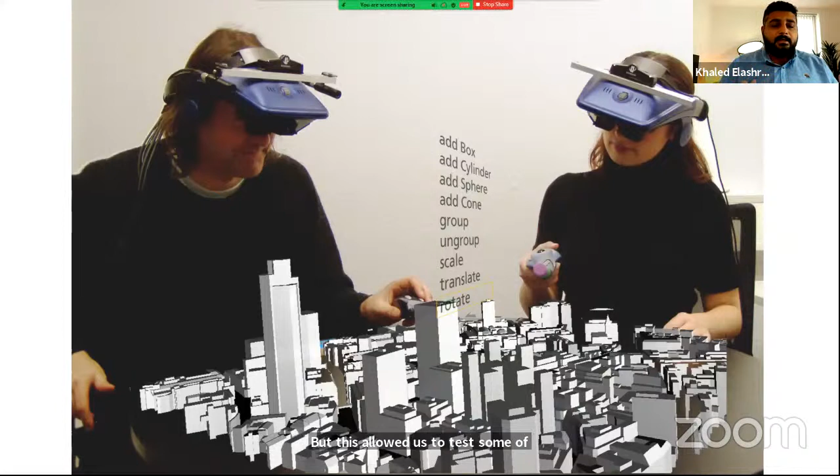But this allowed us to test some of the use of design in augmented reality early on, though the technology was not yet very widely distributed. Because we investigated the possibilities of the technology so many years ago, today we're able to use augmented reality and virtual reality not only for visualization, but also for team collaboration and design. This is very important because collaboration is a core part of our design process.

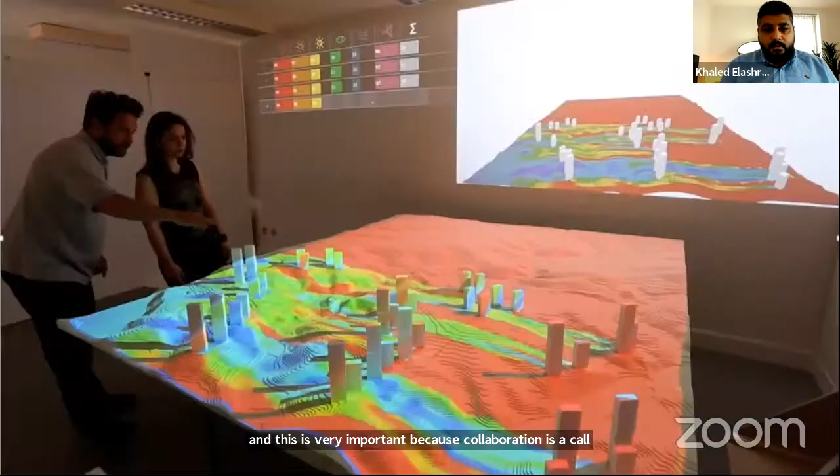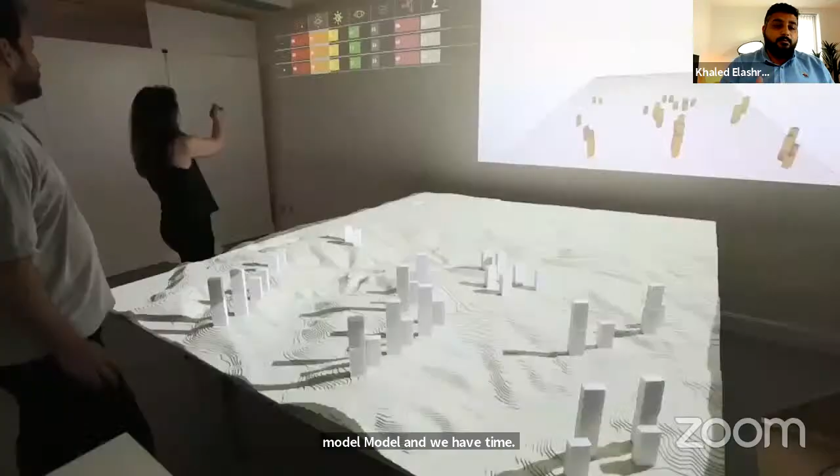The office's focus on performance-driven design and sustainability inspires a lot of the tools that we developed. What you see here is one of our bespoke applications to quickly analyze options and break down the barriers between physical and digital modeling. So, for example, we are tracking and capturing a physical model in real time, where you can manipulate it, change the location of the buildings, and at the same time get instant feedback on what the performance of this design might be.

And of course, as technology develops, our bespoke performance-driven design tools also evolve. So, for example, now we're using gaming engines to develop our latest application called Sandbox, which is an interactive application that works like Minecraft on steroids, where the user can go in, create design options, and analyze them in real time. It can also run in multiple interfaces from touch to AR and VR.

There is a variety of performance evaluation criteria that drives our design decisions, and even more so when we are not just looking at the building scale, but also at the city scale. So from sustainability to investment models, there's a lot of things that can drive how we design urban spaces.

So we bring the process of optimization according to these drivers, not just for buildings, but also for cityscapes. For example, if you're having a road network and discrete buildings, we can instruct a computer to go through hundreds of thousands of iterations, running through a multitude of analysis, and at the end provide a solution space that we can check and find the best performing option out of it.

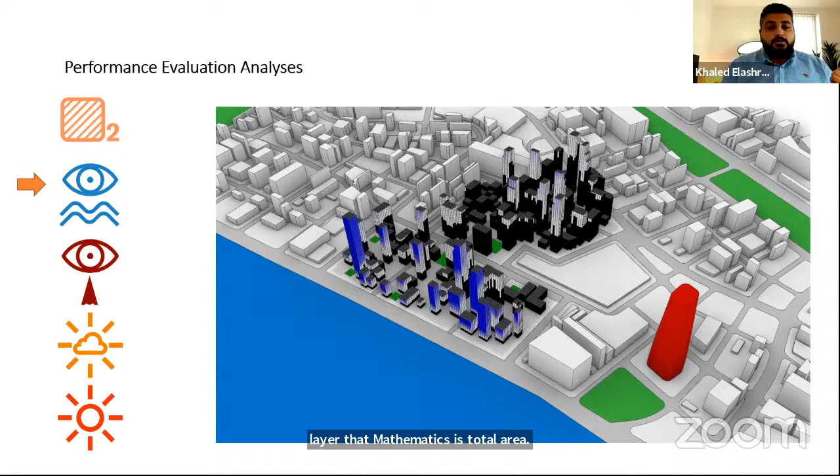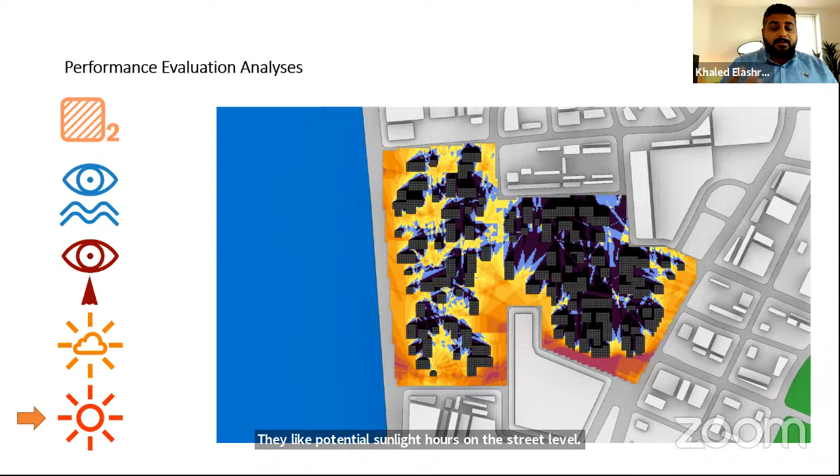Let's take this example. We look at finding a building layout that maximizes total area, views towards the river, views towards a point of interest, daylight potential, sunlight hours on the street level. Usually you would spend months and months creating and analyzing different options manually.

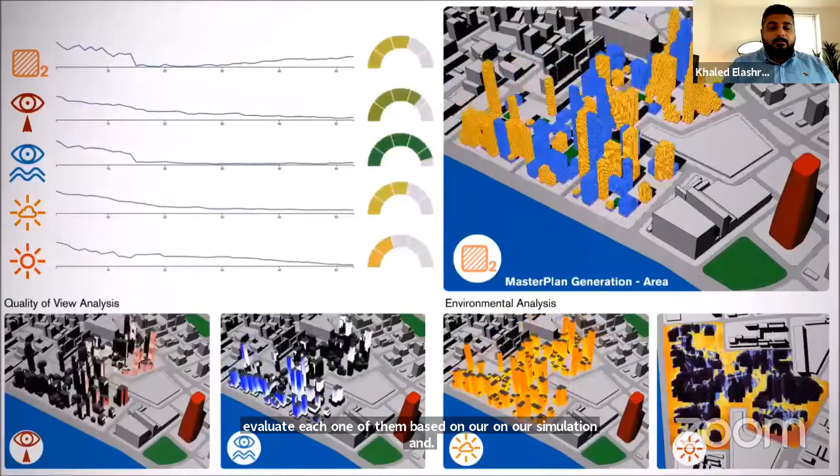But what we do is we actually use a genetic algorithm to create thousands of generations of options, evaluate each one of them based on our simulation, and this allows us to cut short the process that can take months and months into a matter of hours.

And what we do here is we actually run it on large scale cities, not only on buildings. But as I said before, innovation can be applied on all scales and all stages of design.

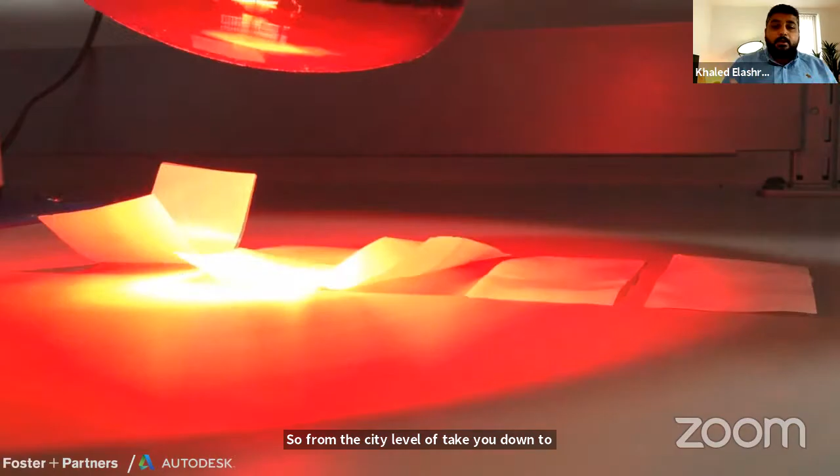So from the city level, I'll take you down to the material level, where in collaboration with Autodesk, we used machine learning basically to predict how a passively actuated material could react to temperature.

So with the help of a tool we have in the office called Hydra, we run thousands of analyses to understand how these laminates might behave under varied heat conditions.

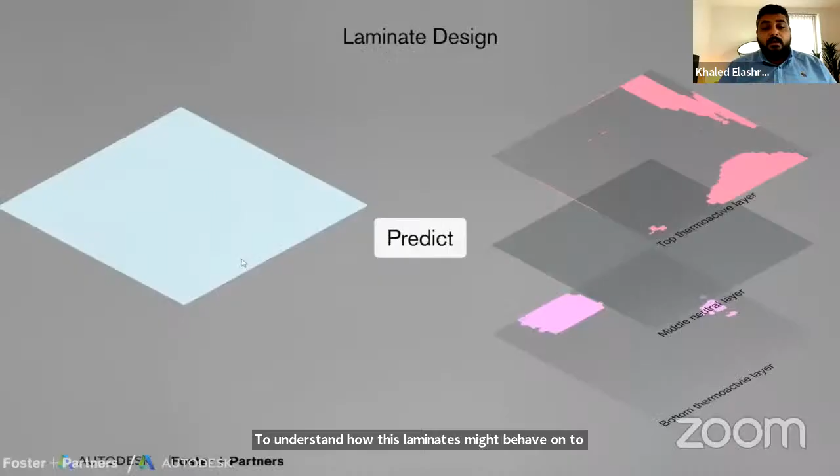We then used that data to train a deep neural network to tell us what laminate layering we should have given a particular deformation. So we kind of reverse the operation in order to be able to check our design intent first, and then figure out what materials, what layering we can have in the laminate material.

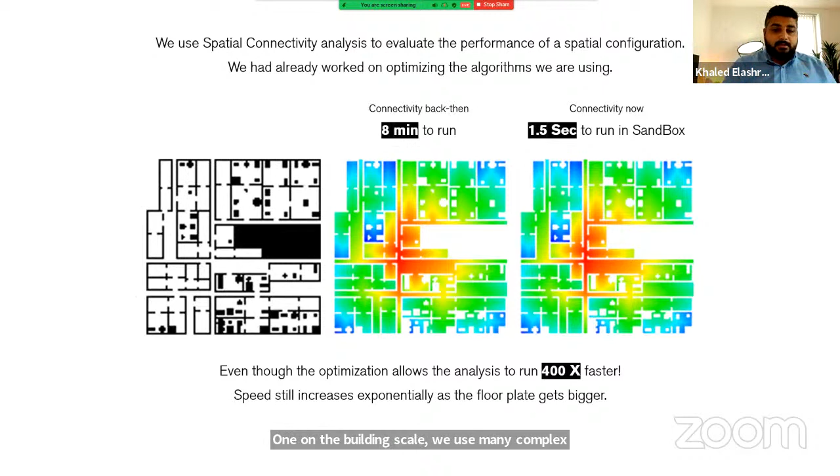Sorry, I skipped one. On the building scale, we use many complex analyses to validate design intent. One example of that is an analysis that measures connectivity from one point of the plan to all others.

This is usually a good indication of how well the plan is performing as a co-working space, but usually it takes a lot of time to run. So we use machine learning to train a model that can predict the result of the analysis without the need to run the analysis itself.

And in the end, we can have a speed increase of almost 50x from running the analysis, from using our model rather than running the analysis.

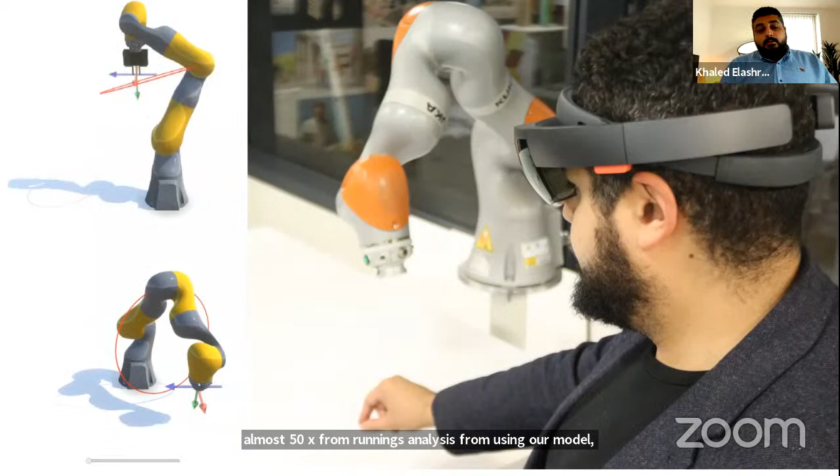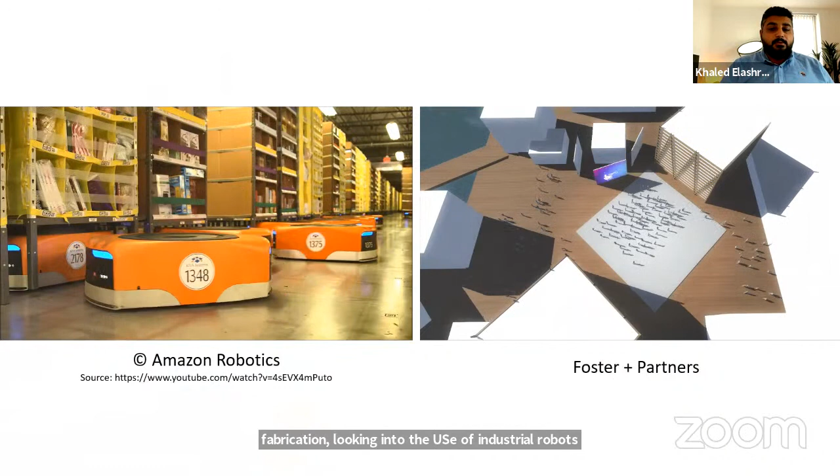We also have big interest in robotics and in fabrication, looking into the use of industrial robots, and increasingly looking into the use of mobile robots like the Amazon Kiva robots, for example, to reconfigure architecture spaces, both in the interior and the exterior, which gets us to the main topic of today, which is the recent collaboration we did with Boston Dynamics.

This was a group effort headed by Martha Tsigkari and Adam Davis, who are partners in charge of our team. And I'm happy to hand the stage to Anders and Sherif, who will talk you through the process.

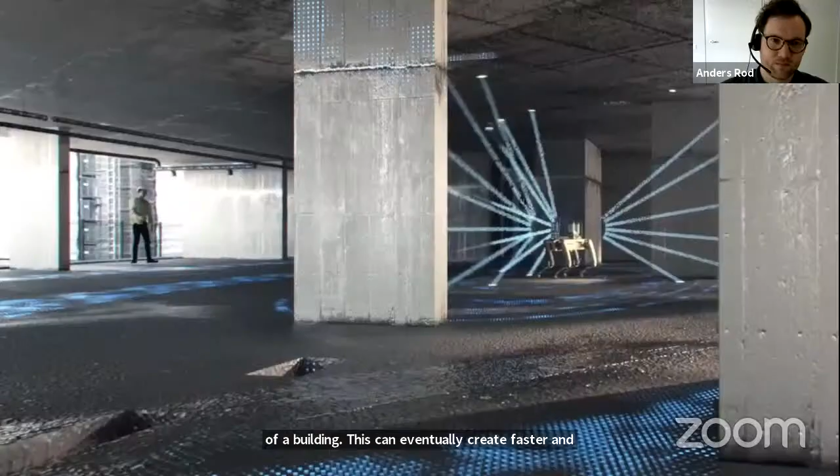This is because constant and quick checks to monitor accurate timeframes on site can be instrumental in integrating design and construction and allowing for further flexibility.

Additionally, we have been investigating how these scans could be of use, not only during the design and construction process, but also when the building is operational.

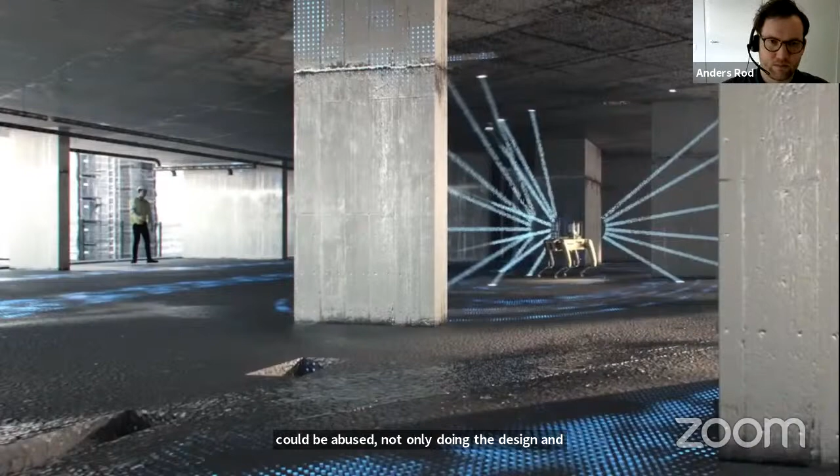We see great potential in digital twins, that is, a digital representation of a real-world process. This image shows the hub space on our campus. The hub is a flexible working and social space with a wide range of uses and constantly changing furniture layouts.

Scanning spaces like this at a regular interval allows us to assemble a detailed timeline of the space. By creating and using this twin, we can visualize and simulate interactions between the designed space, occupancy, environmental condition, and energy usage.

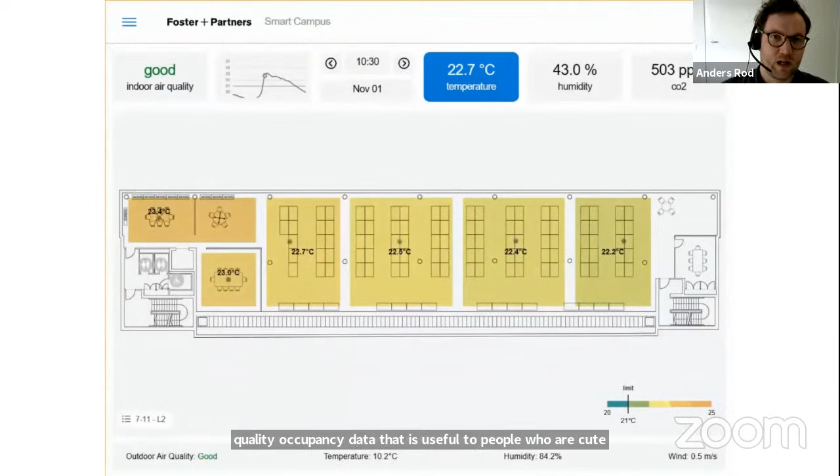Smart buildings gather information such as air quality and occupancy data that is useful to people who occupy and manage them. Our corporate headquarters in London is a smart campus with detailed readings of air temperature, other air quality measures, and occupancy, and we're doing this across our estate and across seasons and years. Repeated scanning sessions allow us to correlate changes in the sensor data with changes in the physical fabric of the building and spaces.

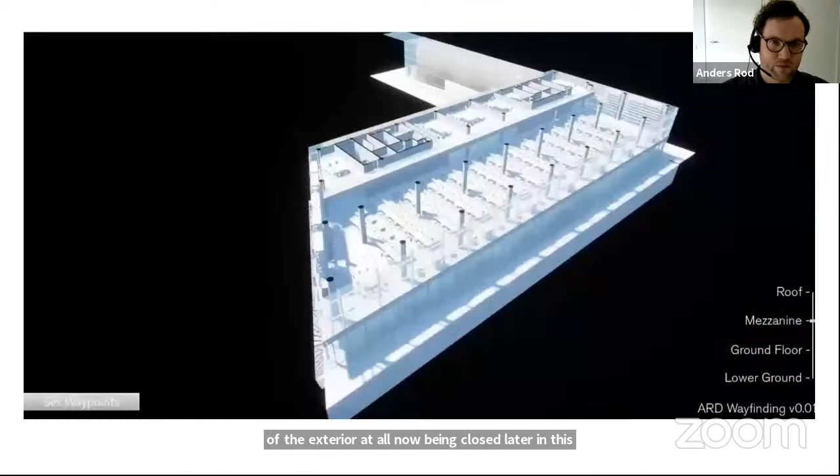Sophisticated, up-to-date spatial information is also critical for wayfinding. Here we see a three-dimensional wayfinding application for our main studio space in London. With the addition of environmental and occupancy data, such an application can help staff and visitors find spaces appropriate to their intended use and personal comfort. Imagine telling a virtual assistant, 'I would like a cool space for a quiet meeting with two of my colleagues,' and then just being shown where to go.

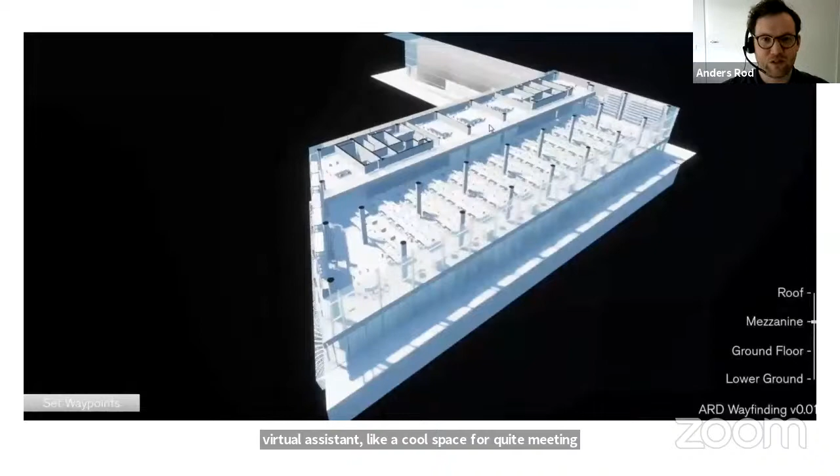We are also interested in digital representations of the construction site and capturing how the construction progresses over time. My colleague Sherif will discuss these construction twins in detail later, but before that, he will introduce us to Spot.

Like Khaled mentioned earlier, we have always been interested in using 3D scanning on site. We met with Boston Dynamics during a conference and started talking about the use of robotics on site. With our interests and vision aligned, we were invited to their early adopters program. At the time, back in February 2020, we were the only architectural firm on that program.

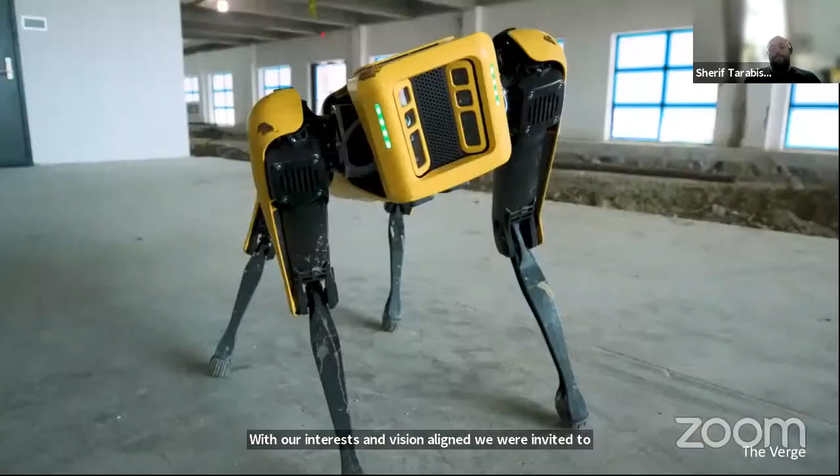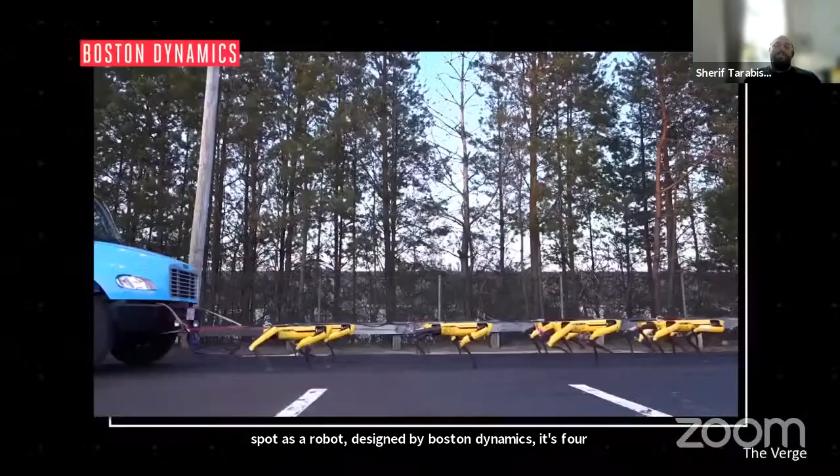Spot is a robot designed by Boston Dynamics. It's a four-legged, semi-autonomous robot, and of course it's also an internet sensation. You might have seen it with its friends towing trucks, dancing to Bruno Mars, or even having a choreographed dance with its extended family.

Spot is a very capable robot. It can maneuver tricky terrain. It is controlled by a tablet where you can set and control different features and parameters. It can move through the controller or autonomously.

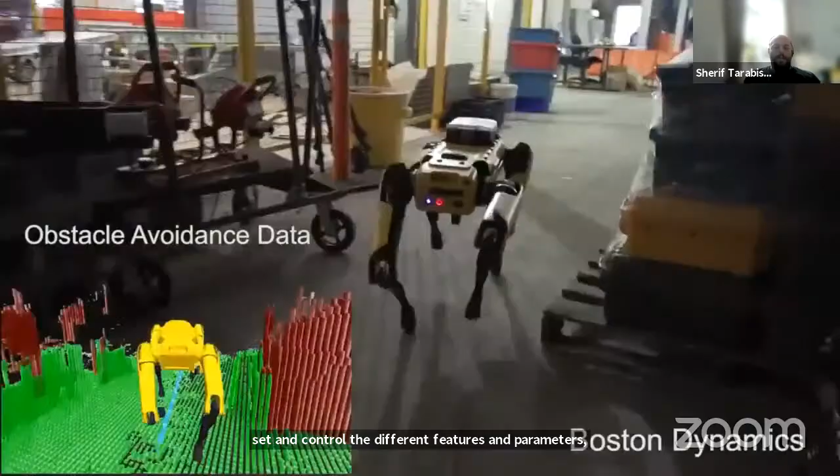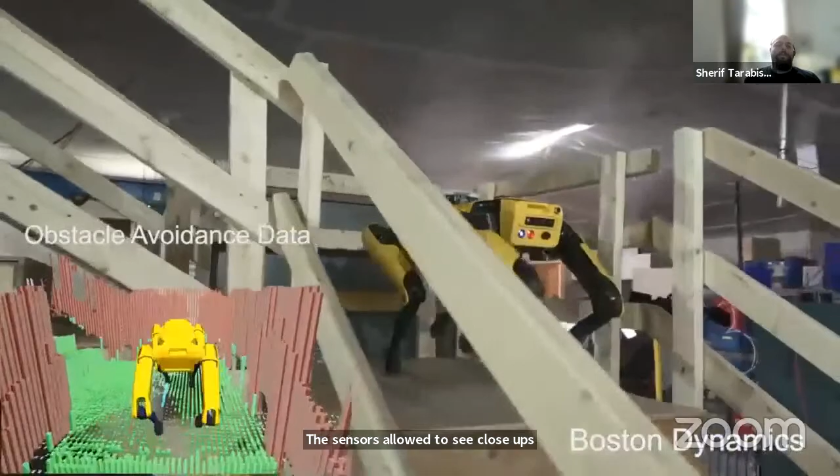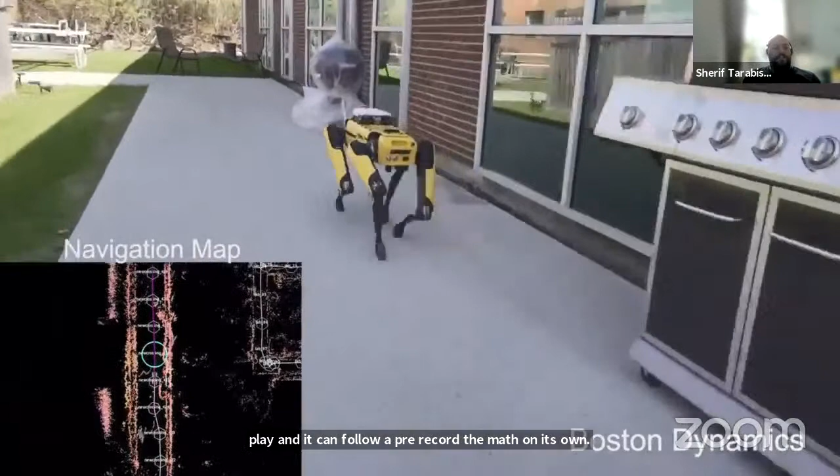Spot can also be set free. You basically just press play, and it can follow a pre-recorded path on its own. We will cover this feature in depth later and see how we used it. All of those capabilities make it a very great tool to use on site because it can go almost everywhere a human can go, and even more places that a human can't. The obstacles it can overcome, we have seen other types of robots miserably struggling with.

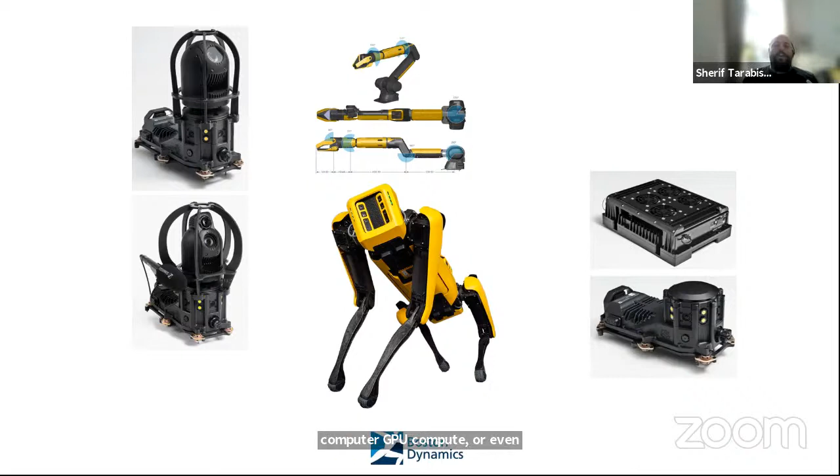There are different things that you can pick and choose in order to customize your own Spot, from extra CPU compute or GPU compute, or even an extra robotic hand. Our setup specifically had a LiDAR scanner, which you can see in the front. This is similar to the one you might see on autonomous cars. This scanner is only used by Spot itself to facilitate its autonomous navigation.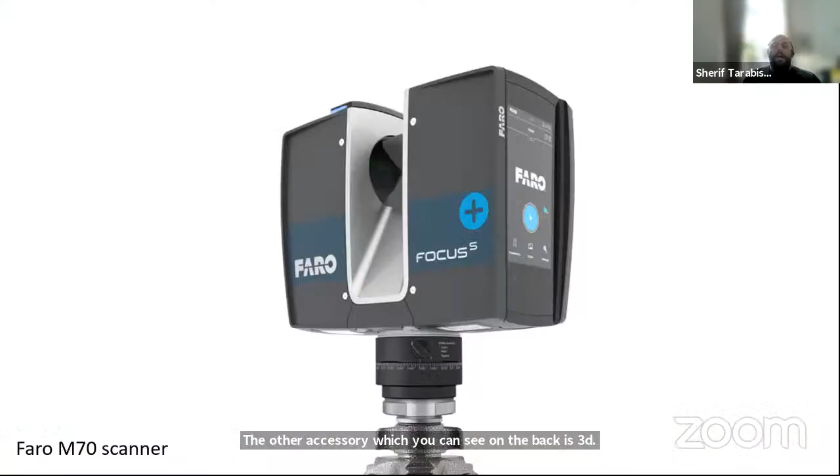The other accessory, which you can see on the back, is a 3D high-resolution laser scanner made by Faro. The one we were using was the Faro M70 scanner, and we specifically used Faro at that time because Boston Dynamics had the most mature API integration with that specific device. More integrations were added later on with different manufacturers.

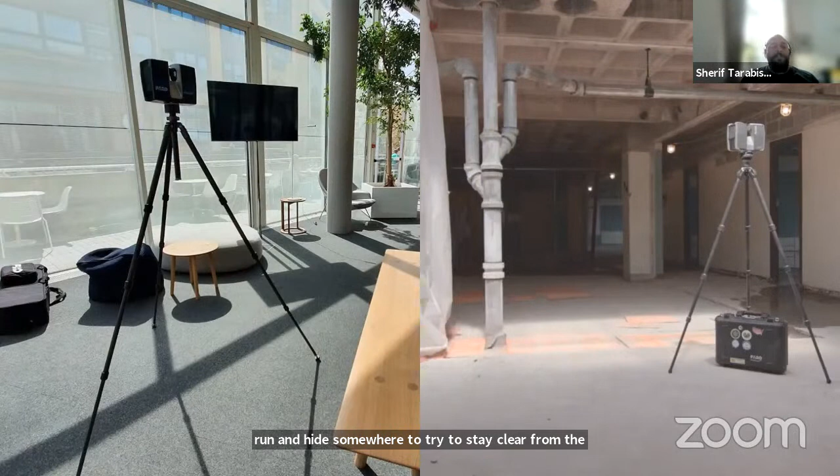Traditionally, the process when using such a scanner manually on site involves the operator moving the scanner from one location to another. At each point, they need to initiate the scan and then run and hide somewhere to try to stay clear of the line of sight of the scanner, which is usually hard because it's 360 degrees. Then basically you keep doing that until you have the whole site covered. It's even more tedious if you want to do that not just once, but multiple times throughout different time intervals.

Once you acquire the scans, the next task is merging them into a single scan. This process is called registration. Anyone who did this, they definitely know how tedious it is.

But if we go back to the usual process, once you have those scans loaded on the computer, you start grouping them based on proximity or similar features appearing in the same scan. And what you do is you first attempt to align them automatically through the software provided by the manufacturer you're using. The success rate of this process isn't usually high.

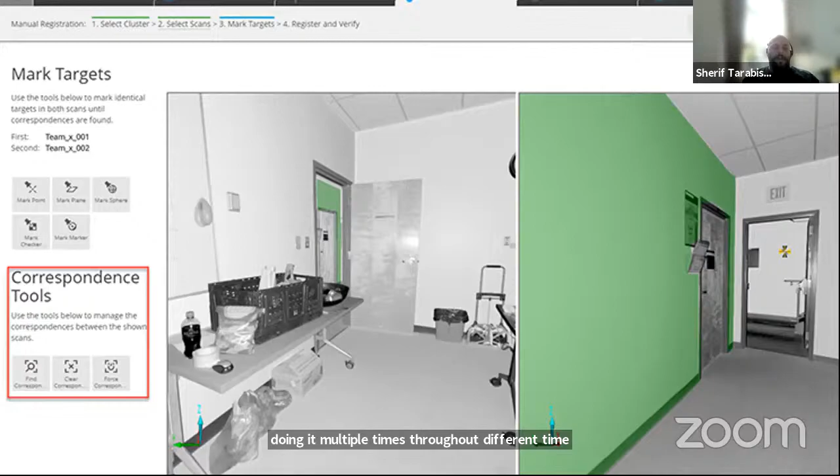Spot, on the other hand, has a great feature where, starting from a known location using a marker, the one you can see on the wall on the left, you can start recording what we call a mission by manually guiding Spot through the space and identifying where scans need to be taken.

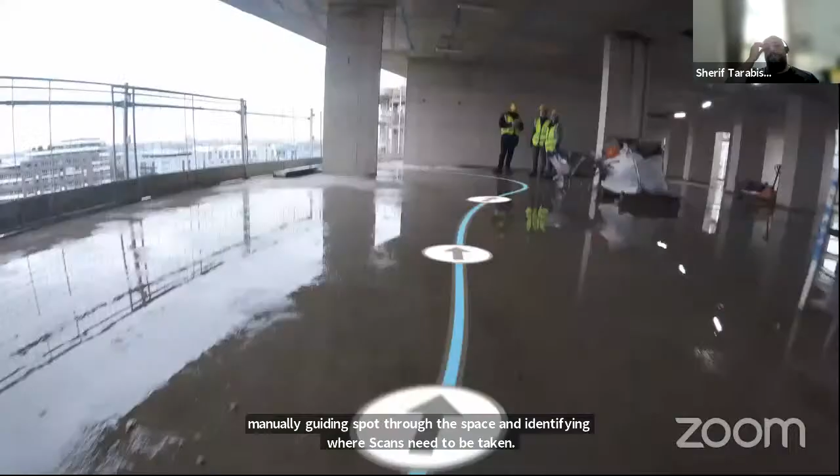While guiding Spot through the mission, it records its surroundings and its movement through the space. Later, you can ask it to repeat the exact mission over and over again as many times as you want, even when changes are introduced to its surroundings.

On the tablet, you can see how it records, identifies, and matches obstacles, those colored points. You can see the colored points, and this is how internally it keeps track of the obstacles, matches them when it's repeating the mission, or updates them if it sees that something changed on site.

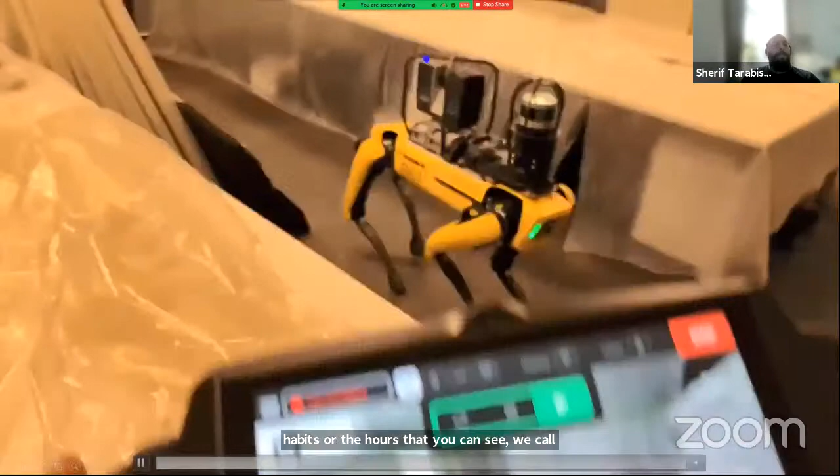And the arrows that you can see, we call them waypoints, and they are showing its general intended flow within the space.

During the route of the mission, you can tell Spot to stop and do a specific action at any point. In our case, those actions were usually take a scan. And because Spot is keeping track of all the transformations since the start point of the mission with the marker that we had, this data can be embedded as metadata in the scans and used to automatically align multiple scans from the same mission, or even scans from sequential replays of a given mission.

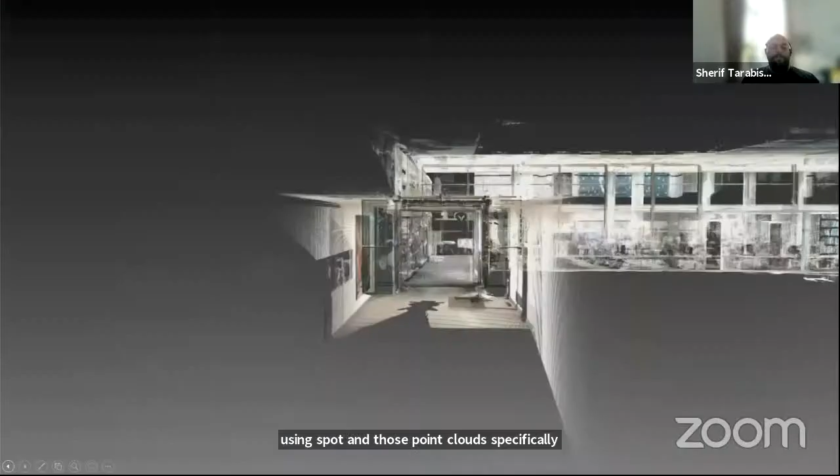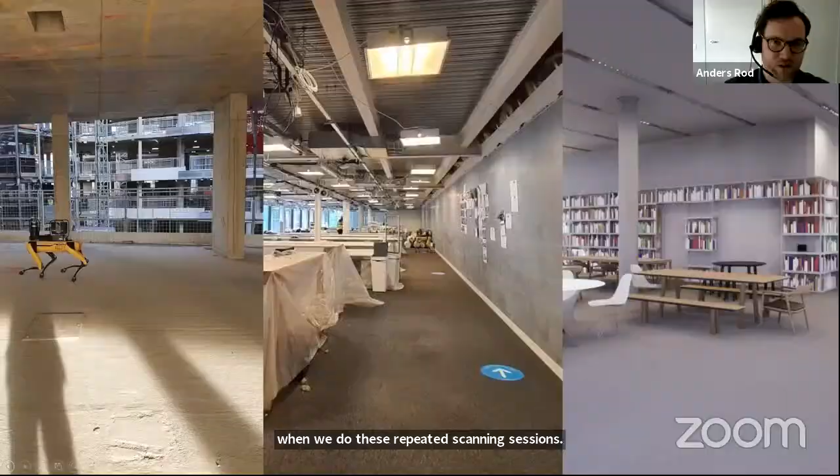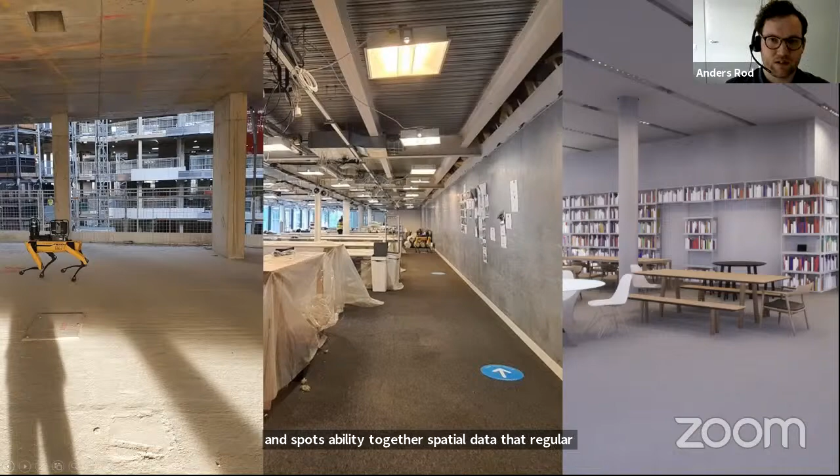In the most general sense, Spot is useful whenever we want to get four-dimensional information. That is a snapshot of a space at a specific point in time, or when we do these repeated scanning sessions, how a space changes over time. But we might also say how time changes over space. How do decisions about construction phasing issues affect the amount of time required for a particular operation? Or how do spatial arrangements of furniture, for instance, affect the amount of time that people spend in the space? Spot's ability to gather spatial data at regular intervals is a big piece in this puzzle.

We're describing these 4D models as twins, and for this project, we have grouped our study cases into two. On the left-hand side, the construction twin, which is the four-dimensional representation of the construction site, where we are comparing a BIM model to how the as-built progresses over time. On the right-hand side is the post-occupancy twin, which is focusing on how the physical space is being used. Here, the spatial snapshots from Spot are used in combination with other data sources, such as occupancy levels and environmental information.

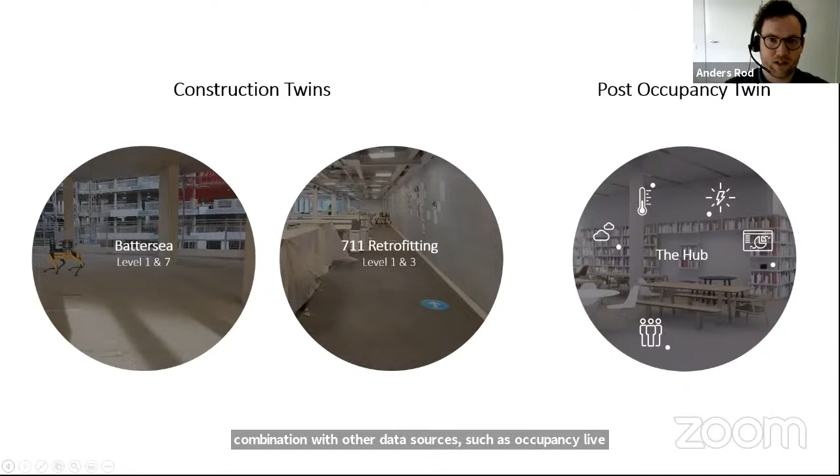All in all, we managed to do more than 280 scans with Spot. When we started this project, Spot was on version 1.6, and we were running into a lot of technical issues. But I guess that is just part of being an early adopter.

As part of our regular meetings with Boston Dynamics, we were providing them with feedback about the issues we were encountering. So when we got back to round 2 in July and August last year, Boston Dynamics had been working hard on implementing a lot of our requested features. We'll go into more detail about these specific changes later in this presentation.

As for the case study for the post-occupancy twin, we decided to use this multi-purpose space in London, which we call the hub. As I previously mentioned, the use of the hub ranges from being a breakout space, a space for focused work, for lectures and social events. And the furniture arrangement changes accordingly, giving us a variety of spatial configurations to investigate.

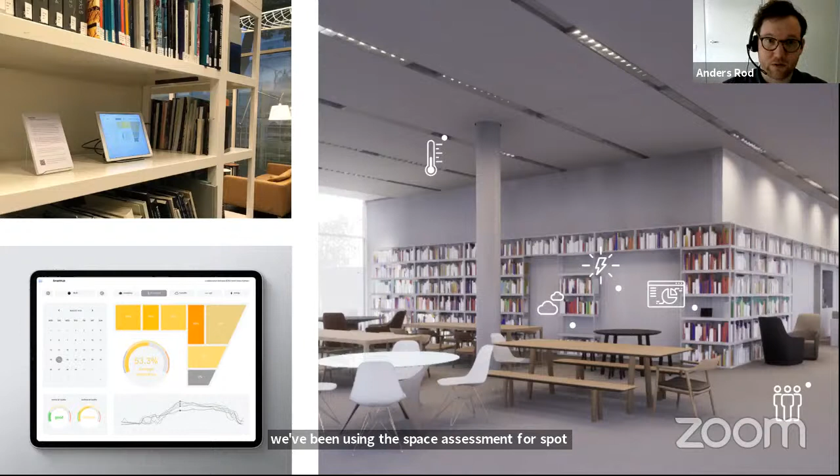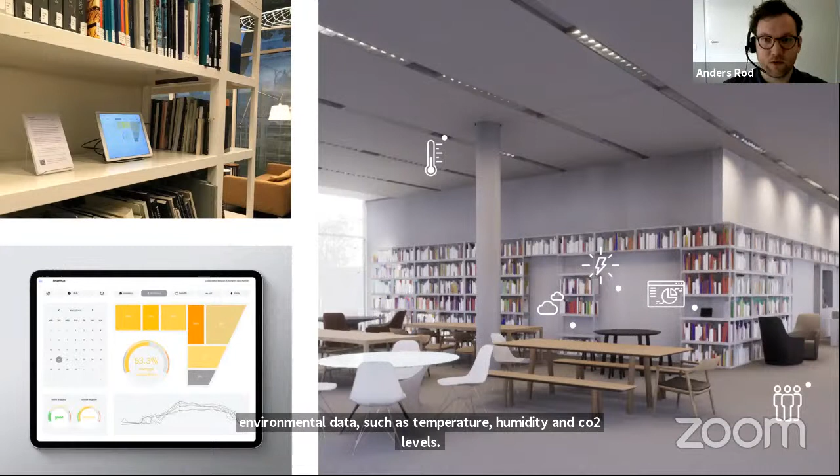As part of a separate research initiative, we've been using this space as a testbed for smart building technologies. For this space, we have environmental data such as temperature, humidity, and CO2 levels, as well as occupancy data. Here, a research goal was looking for spatial insights by comparing the point clouds with environmental and occupancy data.

So we were scanning the hub on different days with slightly different spatial configurations. The plan you see here is actually a plan view of a point cloud, and the yellow dots are the scanner positions. So if you take all 8 yellow dots, that would be one mission.

During this time, as mentioned before, Spot was on version 1.6, and one of the limitations was that we had to do the whole mission in one go. So if one scan failed, or the robot got stuck or lost Wi-Fi connectivity, the whole mission would fail and we'd have to redo it all again. This is one of the things that was addressed later in version 2.0.

We decided to do the scans in this space in fine detail, as well as adding colors to these scans, whereas some of the scans on the construction site we could do with quicker settings. So on the construction site, we spend a bit more than a minute per scan, but here in the hub, we spend around 5 minutes per scan.

As you see in the video, if we can get it playing - yes, here we go. Spot has a cage on the back that protects the scanner. This is important specifically on the construction site in case the robot falls over, to protect the scanner. But this cage actually occludes some of the points in the point clouds. Therefore, we want to try to scan without the cage here.

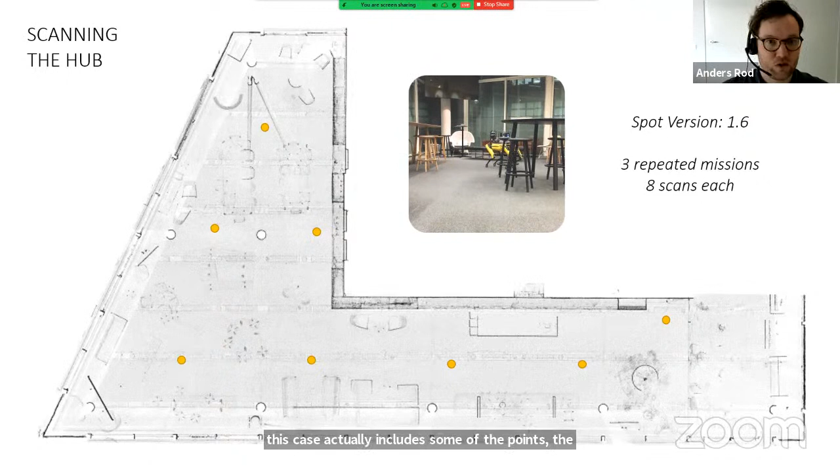We ended up first doing a test run where Spot would walk the route in order to ensure that Spot is able to detect all the obstacles, such as the furniture. Then afterwards, we remove the cage and do the full scan.

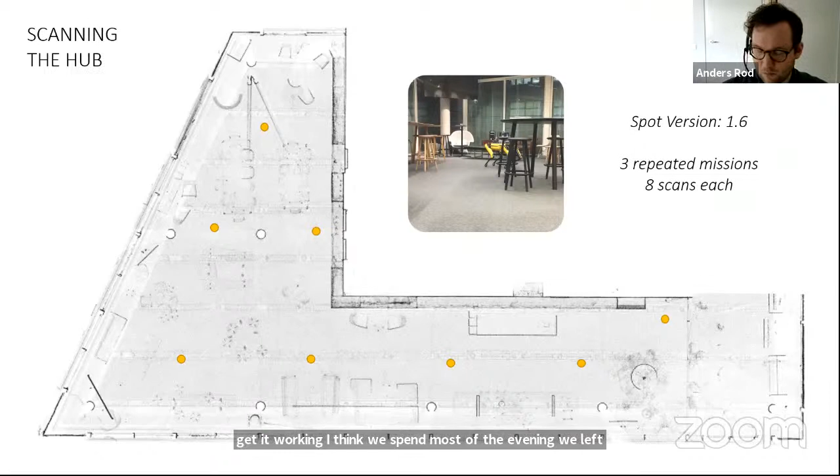The first time we went to the hub in order to set up the mission, try everything out and get it working, I think we spent most of an evening. We left pretty late, but on our third session, that one literally just took an hour, which included bringing Spot, powering on the scanner, positioning Spot in regards to the marker, doing the test run, and then doing the 40 minutes fully automated scanning. So for these kinds of repeated scanning sessions, Spot's automation features add a lot of value.

What you see here is a comparison between 2 different dates - a February date and a March date from last year. One of the differences between the two point clouds was this presentation board that just disappeared now, which was only present in one of the two scans. On the right-hand side, there's a flower vase that also disappears, again only present in one of the two scans.

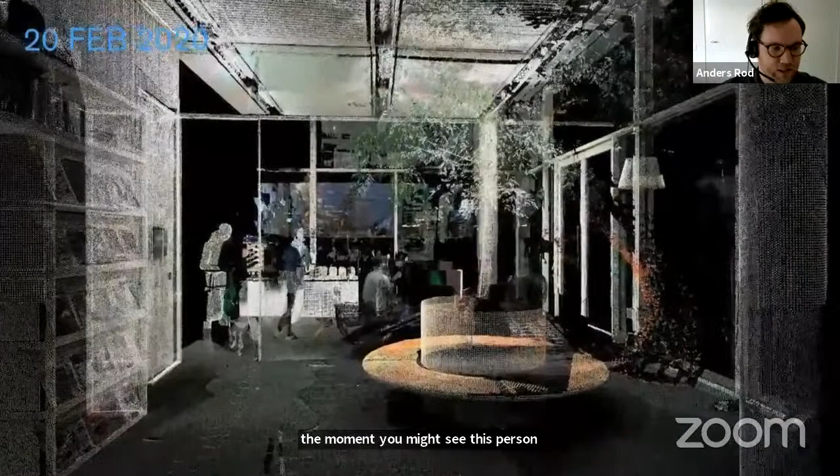And then all the way in the back, you might see the silhouette of a person - here you can see to the left. This person is probably wondering, what is a robot dog doing here? Now Sherif will tell a bit more about how we've been using Spot on the construction site.

Level 1, on the other hand, had progressed further. Rooms were already defined, and mechanical equipment to be installed was already stored on the floor, so it was very hard to navigate around the space.

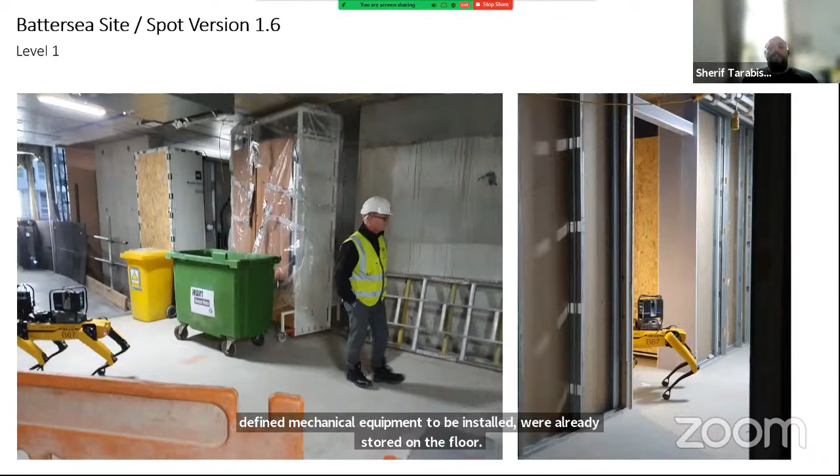We had some challenging constraints in this case. The first was battery life. Back then we were using Spot version 1.6, and losing the battery meant basically that we had to start the whole mission again from the beginning. This was something that was later resolved by Boston Dynamics. The second issue was that we couldn't afford repeating the whole long walk again from the beginning if the last couple of scans failed for any reason. Again, it was an issue limited to Spot version 1.6.

This led us to breaking down this whole floor into different scans or different missions. It was too much fun trying to troubleshoot problems on site when we had limited access to batteries and so on. Basically, one of the objectives of being part of the early adopters program was identifying all the issues we could face on site and communicating all of them to Boston Dynamics.

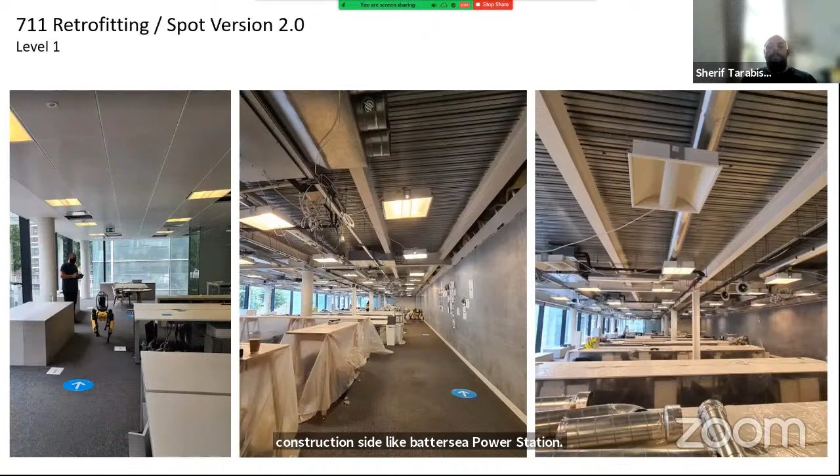Once the lockdown started, we decided to move to something closer and easier to control than a construction site like Battersea Power Station. We looked into tracking the progress of retrofitting one of the buildings on campus, called the 711 building. We tracked two different levels, level 1, which we see here, and also level 3.

It was the first time we actually managed to do a single Spot mission with this number of scans, the yellow dots, which were around 17 scans.

At this time, Spot software was now at version 2.0, and a lot of the concerns and problems we were facing previously, which we'd already raised with Boston Dynamics, were resolved. Mainly, stability increased drastically.

Most notably, we were now able to swap batteries mid-mission. Previously, if Spot lost battery power, it would just sit down and the whole mission would be over, and you'd have to start it again from the beginning. But now, Spot still lies down on the ground, but you can just flip it over, swap batteries, press play, and continue from where you left off.

A similar thing was happening previously when we had a comms drop. In this mode of operating Spot, you still needed to follow it with the controller, and a connection had to be maintained between your controller and Spot. If at any point this connection was lost, Spot would just lie down and you'd lose the mission, having to repeat it all over again.

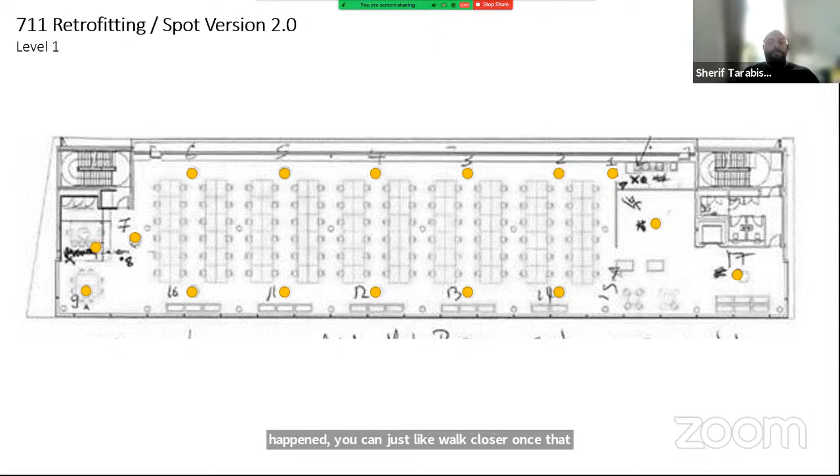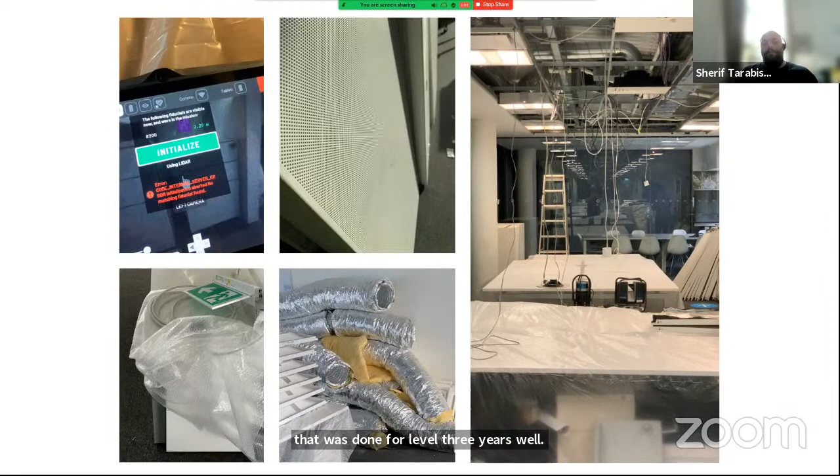One of the problems we faced at this site was how some materials affected Spot's navigation, like the ceiling panels with fine holes in them, the foil insulation for the ducts, or the bubble wrap and cables hanging from the ceiling. All of those issues were communicated to Boston Dynamics to attempt to resolve as well.

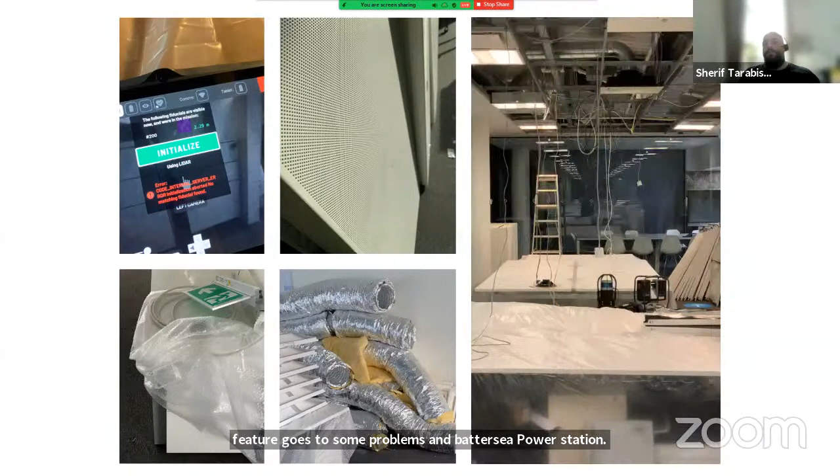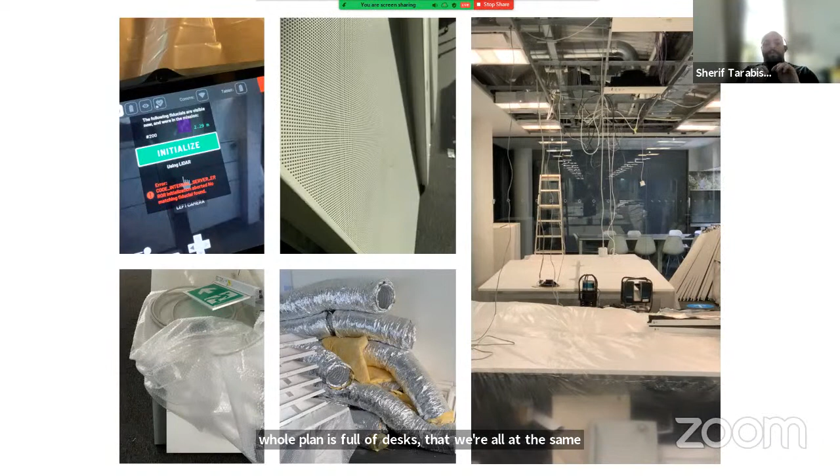One handy feature in 2.0 was the ability to control the height of Spot for each scan. The lack of such a feature caused us some problems at Battersea Power Station, and it was really helpful that it was added by the time we started working here, because the whole plan is full of desks all at the same level as the scanner. Unless we were able to tell Spot to take the scan at a specific height, we wouldn't have been able to cover the whole space.

Another problem was obstacles added in later days after a mission was recorded. Spot can still maneuver around elements introduced to the site, and it did so amazingly well in Battersea Power Station. But here, most additions to the space led to complete blockage of Spot's path. This is something that can be expected to happen in any construction site.

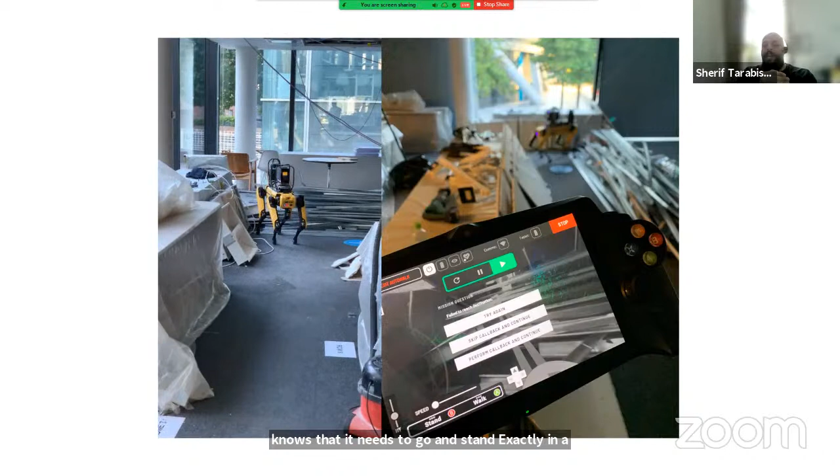So we started discussing with Boston Dynamics different ways of overcoming this, like giving back control to the operator to decide whether to skip the scan. Basically, that room at the very far end of the mission has a scan, and Spot knows it needs to stand exactly in a specific place to take it, but it's not able to reach that point because of the things in front of it. It keeps trying to avoid them, but there's no way to do that.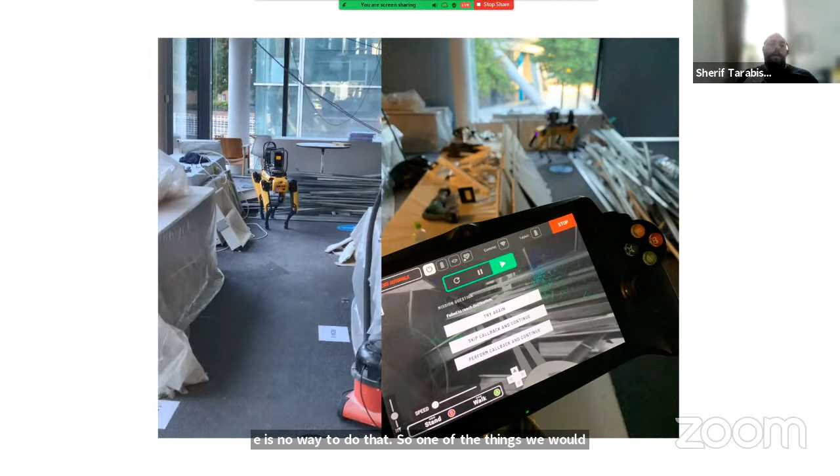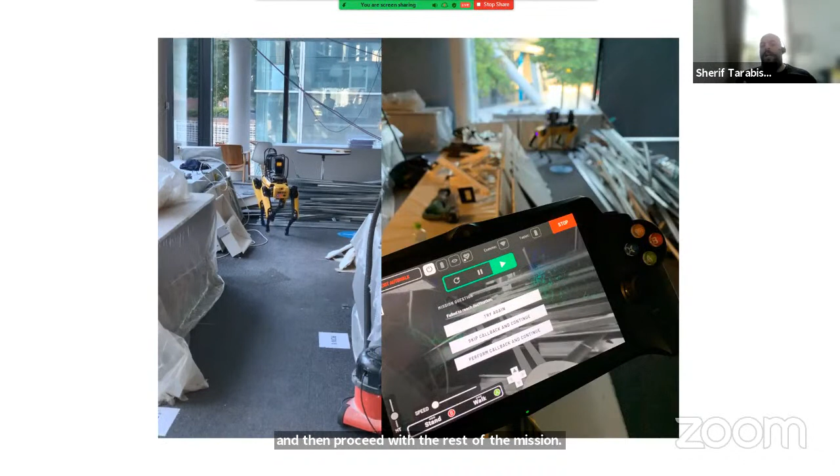So one of the things we'd expect is for the operator to decide whether to skip that point Spot cannot reach, maybe even take a scan from where it is, and then proceed with the rest of the mission. Those kinds of solutions were very important, especially if we're envisioning that the whole process can happen completely autonomously, without the operator following with the controller. This is something we'll highlight later on.

If you go back to our objective of doing this at different time intervals, it becomes even more tedious. That's when we started looking in the market to see if someone already attempts to solve this issue, and whether we'd be able to close the loop on this whole process, or whether we'd have to develop something in-house to resolve it. And this is where AVVIR comes in.

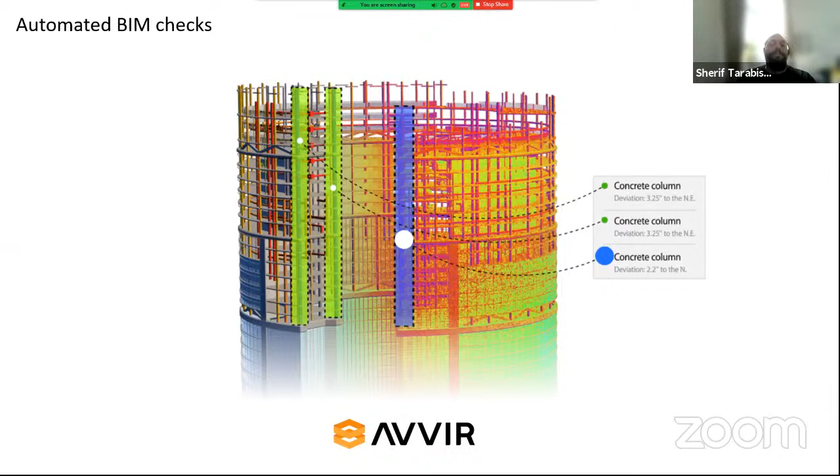AVVIR offers an online service allowing you to automate the process of comparing point cloud data against design intent represented in your BIM model. In this slide, you can see the online viewer, where you can upload your BIM model, again representing your design intent, and then add multiple point clouds to compare against that BIM model.

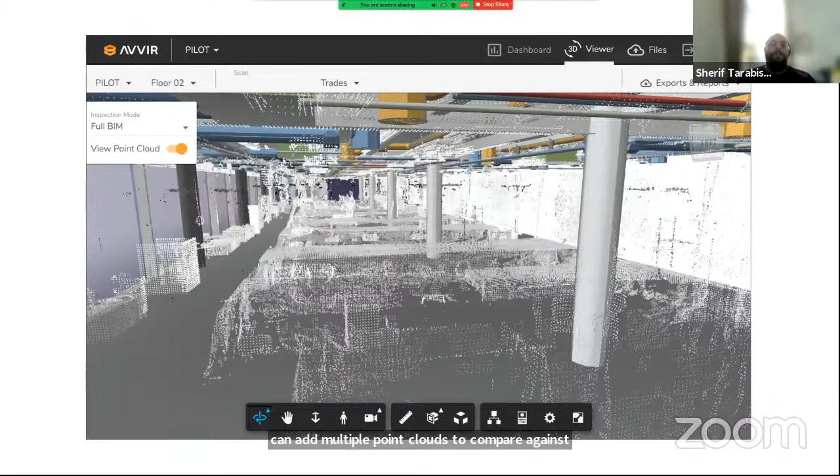Here you can see some items flagged in red, which are displaced in the point cloud relative to their original location in the BIM model. You also get elements in the BIM model that had a deviation to the point cloud highlighted based on a specific threshold you can identify. And you can get an automated report of all of those things, which can be communicated to different stakeholders to see how to address those changes.

The whole process and collaboration was covered by different media outlets. And of course, thanks are due to everyone who helped us, whether inside Foster and Partners or from Boston Dynamics. And of course, the biggest thanks are due to Spot.

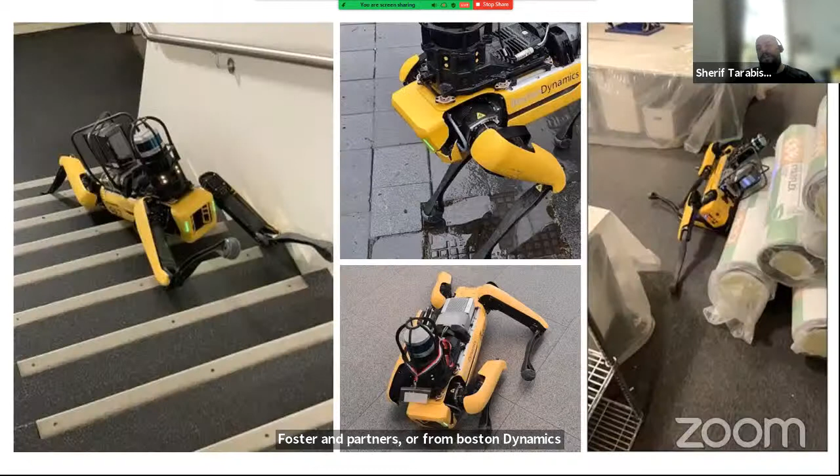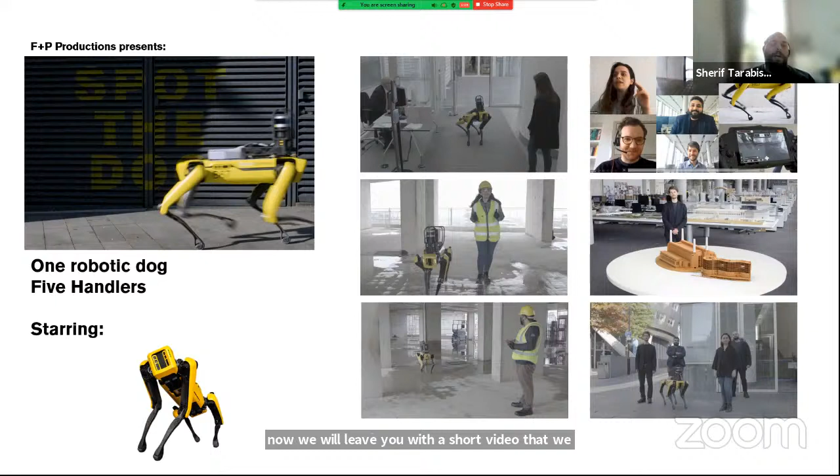It was the one thing that suffered the most with us, from slips in London, rainy streets, and falls on the stairs, but it always got up and continued. Now we'll leave you with a short video that we prepared highlighting this whole process, and then we're open for questions.

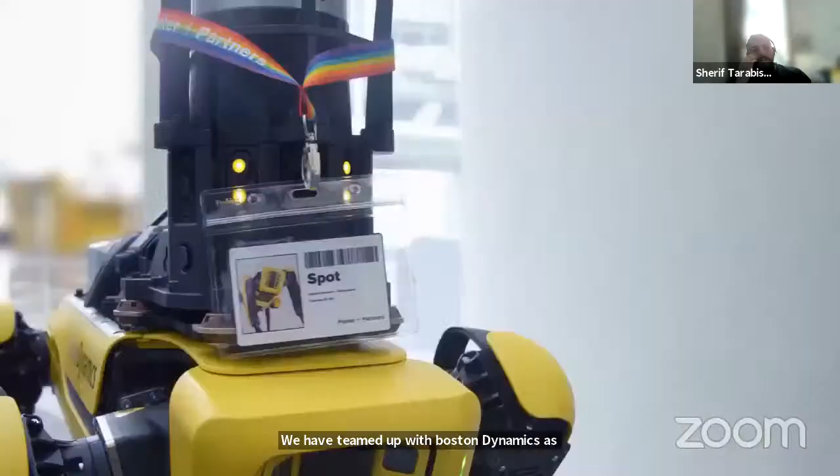Here at Foster & Partners, we have been at the forefront of research for the built environment for over 50 years. We have teamed up with Boston Dynamics as part of their early adopters program for Spot, the semi-autonomous robot, to investigate how cutting-edge technologies can push the boundaries of both design and construction while enhancing productivity, efficiency, and collaboration.

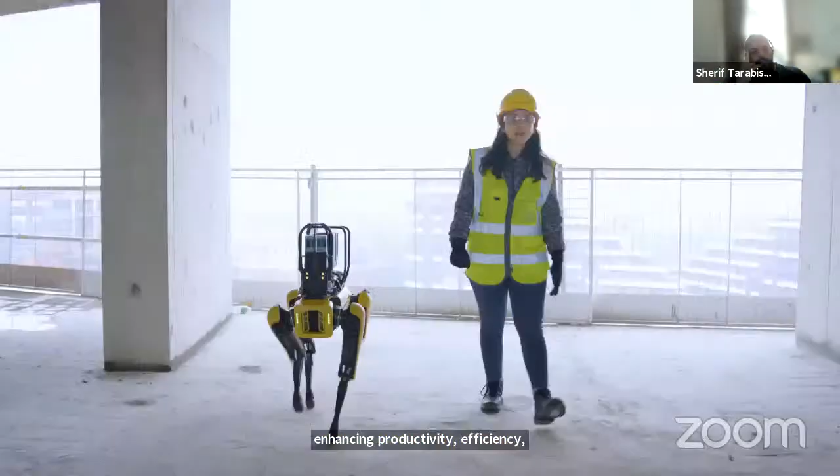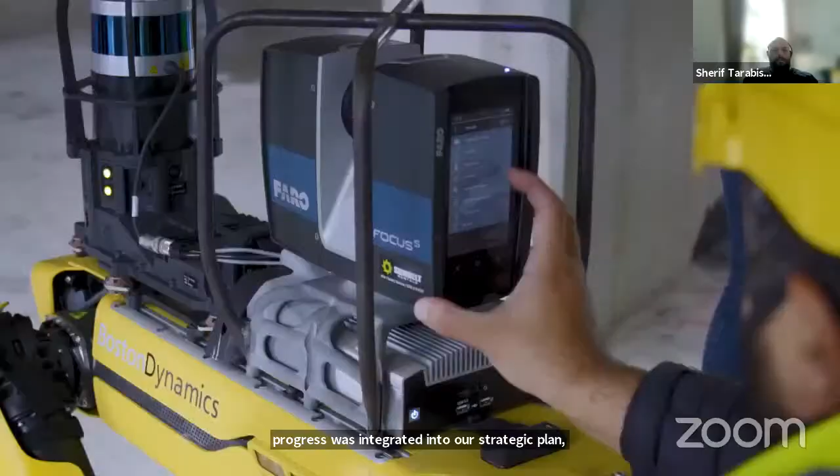3D laser scanning technology to capture and monitor on-site progress was integrated into a strategic plan developed by our Applied Research and Development Group. This enables Spot to capture constant, quick, and consistent scans of construction sites. This precision monitoring tracks progress while still checking as-built versus as-designed models. Scanning and post-processing times have been reduced from weeks to a matter of days, while freeing up staff resource.

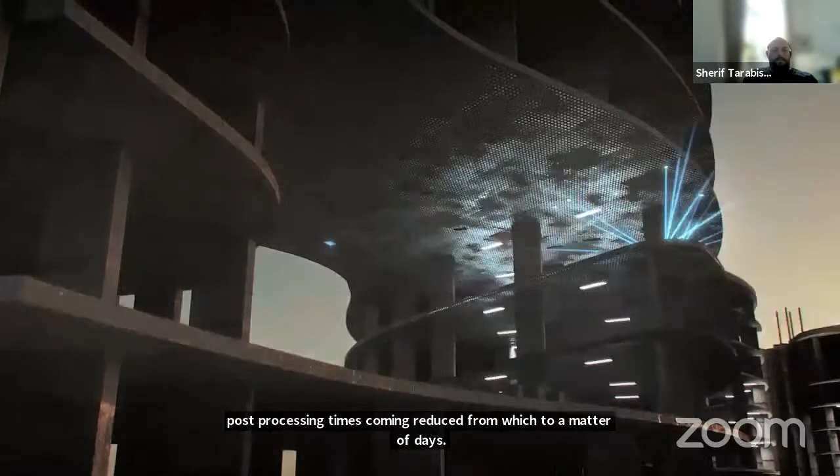Spot's remote control features greatly improve site visit safety and efficiency. Together with its ability to follow a pre-mapped route, Spot provides consistent repeated scans, navigates difficult terrain, and can access hard-to-reach areas on site.

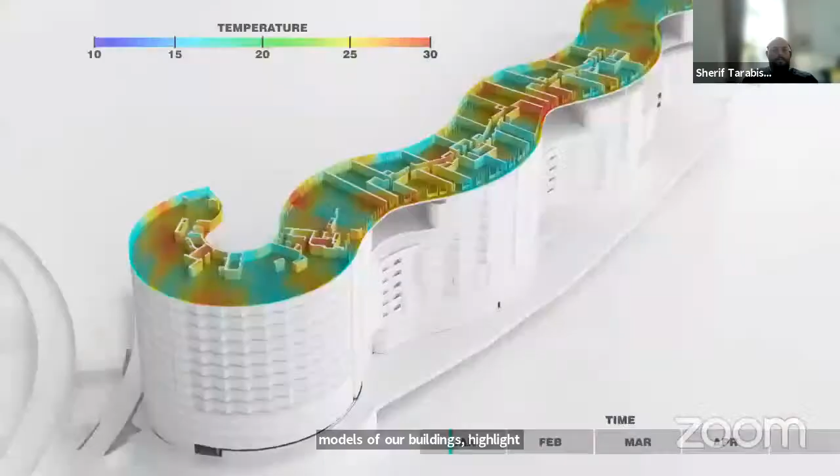This technology could be used to create four-dimensional models of our buildings, highlighting how they change over time. Combined with data from sensors that read environmental conditions and occupancy, we can create an intricate model of how people, furnishings, and environmental conditions interact. These four-dimensional models could become virtual collaboration spaces, available to people who cannot physically be in the same location. Foster & Partners and Boston Dynamics will continue to push the boundaries of innovation, bringing the technology of the future into the hands of our designers today.

Thanks everyone, we're open for all your questions. What an amazing presentation, this is amazing. I had a lot of questions actually. Can I start? Yeah, please do.

I'll start with the latest issue presented. The Spot can go 3D scanning the whole space, recognize the data, send it to the cloud, and do processing on it. So what if Spot has perception and can recognize elements and objects in the 3D scan? Do you imagine how the construction future can be? Can Spot have other jobs rather than just 3D scanning? As the 3D scanning shows, it has a lot of capability in understanding the surroundings, obstacles and so on. Can it do more jobs? I'm thinking about the future of construction, how it can be if Spot has more than just this amazing 3D scanning capability, if it can understand more.

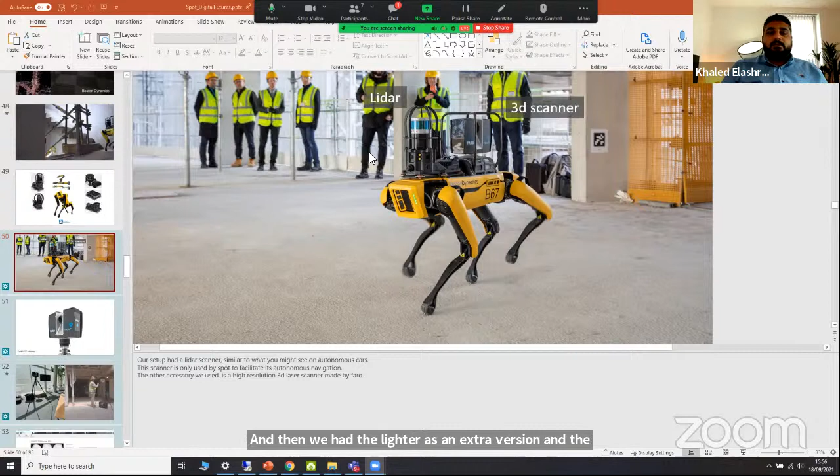Then we had the LiDAR as an extra addition, and the LiDAR was more for the mission. When you record the mission once, especially in a space that's changing a lot like a construction site, you need as much data as possible from the surroundings. The sensors on Spot could be used for missions too, but in a space like a construction site, maybe they weren't enough, so we added the LiDAR to get much more information about the surroundings, so next time Spot can find its location.

So it's kind of layers of it. From the LiDAR, we couldn't use the point cloud for our scans—it was very low quality compared to what we needed. That's why we also added scanners that can go down to about 3mm accuracy, for example.

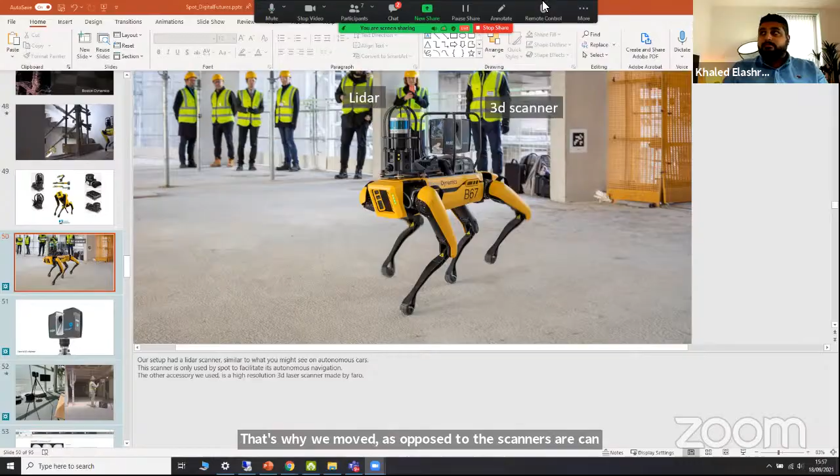I remember when I used LiDAR on my iPad Pro, the quality outcome wasn't clear enough. So how is this generated cloud so helpful when it comes to LiDAR—how is this quality improved so it can become beneficial?

The LiDAR sitting in front of Spot doesn't scan very slowly—it's not a super high-quality point cloud, but there's a lot of machine learning happening to use this lower-quality data and still get a lot of information out of it, rather than just what you'd see with your eyes in terms of quality. The LiDAR is really good for it to find its own location, similar to autonomous cars like Waymo, which now drive just with LiDAR in front and back, plus some cameras.

The 3D scanner, however, is different—you stop, do the scan, and get a super accurate version that's gigabytes in size. That's why we make sure we have a separate scanner; we wouldn't be able to just use the LiDAR data.

With around 3mm precision, right, Khaled? Yeah, for the Faro scanner. So this is the actual data we're using, not the data from the LiDAR—you don't actually have access to the LiDAR data, it's just used internally by Spot.